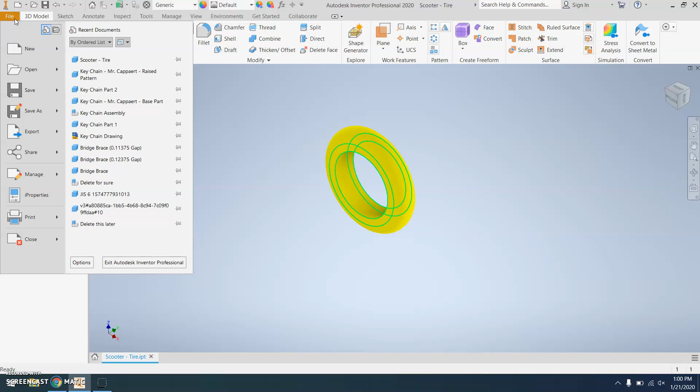In this video, I'm going to show you how to create the tire for your scooter. This is a fairly simple process. So, like always, File, New, Part.

Then what you're going to want to do is change to millimeters. So go Tools, Document Settings, Units, and then under Units of Length, change from inch to millimeters. Then hit OK.

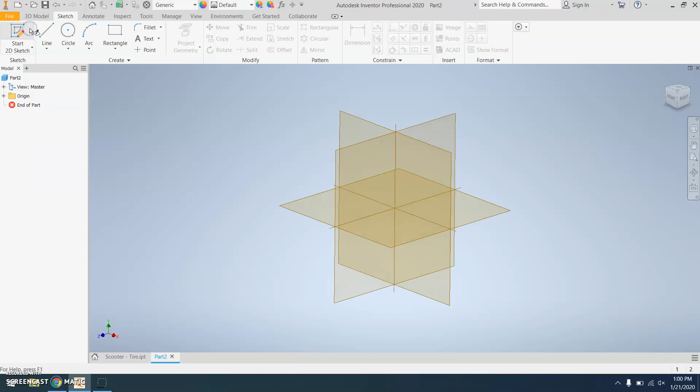Sketch tab, and you're going to start a 2D sketch. Choose the XZ plane. I like to put this so it's in the right orientation. Doesn't matter, but I think it's kind of silly that it came in weird like that.

You're going to then create a circle for the outer part of your tire, 110. So you just click once and let go and then go outwards and then enter 110. Then you're going to do a second circle on the inside of this that's smaller, 70 millimeters in diameter.

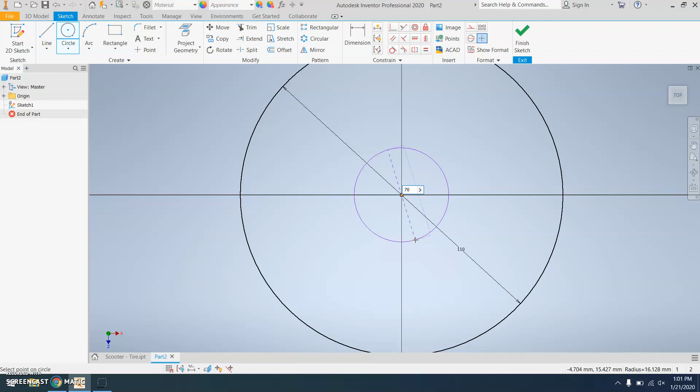You're going to finish that sketch. I would zoom out if you need to. Under the 3D Model tab, hit Extrude. Choose the outer surface here to extrude it by 24 millimeters. Hit Enter.

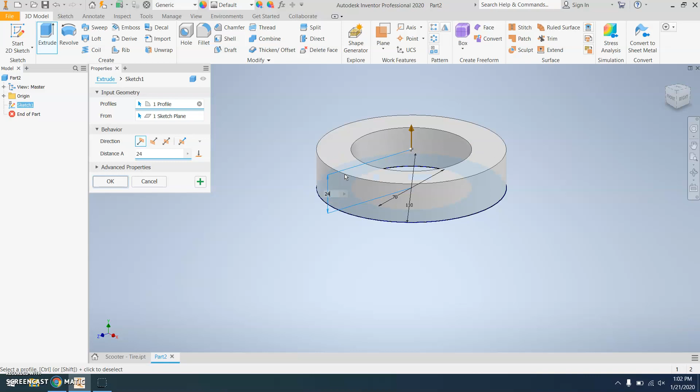You're going to then use the fillet tool to round the edges. Change the radius to 12 millimeters and then click on both of these outer lines. And notice how that makes it a nice round tire.

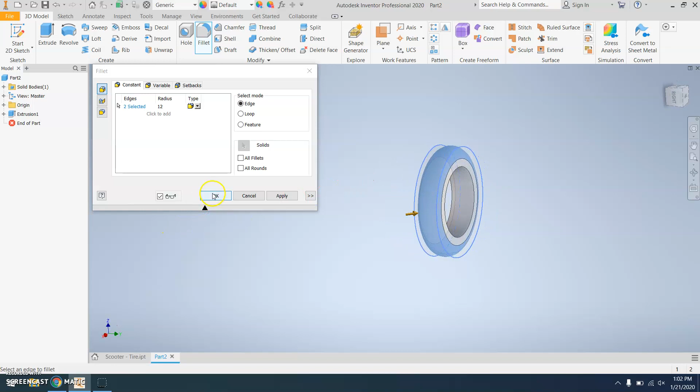Hit OK. And then I'm going to color this yellow. You could do a different color if you'd like, but I definitely want you to color it in. So you click and drag over the whole thing, and then you can use this color wheel to color it in.

Lastly, don't forget to save your work. So File, Save. And then what I would do on your H drive is create a new folder for this project. Click to get into it, and then give this a description that makes sense.

So I would call this scooter tire. And then hit save.